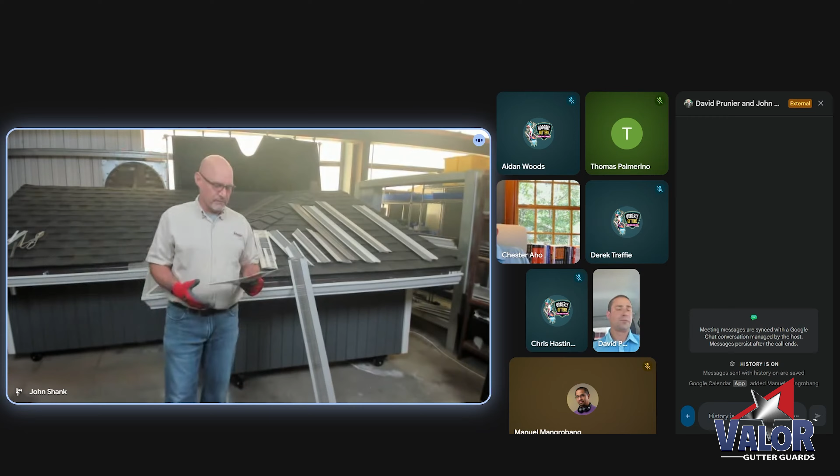So the reason for this webinar today was to just kind of get you guys all familiar with Valor Gutter Guards. Many of you have already sold it before, so you're well versed on what Valor Gutter Guards is all about. I'm going to go over the specification sheet just to give some general information, talk about Valor, why we're in the top echelon of gutter guards, and what makes us a little bit better than the competitors out there. I'm not going to go too much into installation, although I will show some installation stuff in this process, because the salespeople really need to know part of the installation process in order to get a good, accurate estimate on a house.

So the product specifications for this product: we are Valor Gutter Guards. It's made with a 304 stainless steel screen and an 020 cold rolled aluminum frame. That cold rolled aluminum is the same aluminum we use for roof kits or roof caps. Those are 50-year items that we're all familiar with if you've ever worked on roofs.

The screen area on the gutter guard is specific to this guard for siphoning purposes. You'll notice it's smaller than most screens out there, and the reason is because the frame underneath gives it a siphoning system that is unmatched by any other gutter guard out there. The louver frame underneath the screen creates that siphoning, and the design on top also does that. So the design creates surface tension, and then the frame underneath creates 10 times more surface tension, so the water can fall freely through it.

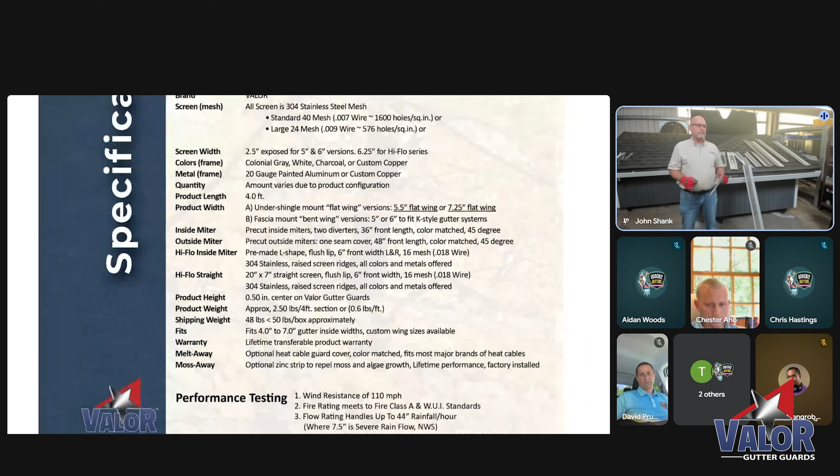Scroll up. Again, the exposed area of the screen - most of your water goes into that screen area in the first inch on that screen. If you've ever done a water test before, you're probably well aware of that.

This gutter guard should only be installed at between an 11 and a 19 degree pitch. If you have to go flat, you can, just make sure you're informing your customers that when you put it in flat, there is a little bit of maintenance involved in brushing it off once in a while, because when the wind stops and the rain stops, if it's sitting flat, the debris stops too. So you want to keep that in mind while you're talking to your customers.

We have the bent wing product, which is what you guys use, and we also have the flat wing product available to you, but you guys focus on the bent wing. So I'm going to try to stick to the bent wing installations and things pertaining to that product. The bent wing product is the most universal. You tend to use more custom sizes in your region, so when you're doing a custom size, we'll get into how to do a proper measurement. If you run into a box gutter or a commercial gutter, we can make custom sizes for those, as you're well aware.

The 304 stainless steel.

The reason they call it 304 is the amount of nickel in the product, so it's giving it its resistance to corrosion. You shouldn't get any discoloration or rust on any of the parts of our products. They should fare very well in any environment. So unless you're right on the edge of the ocean, you're still not going to have too much of a problem, but you might consider doing some other things to give it an extra barrier.

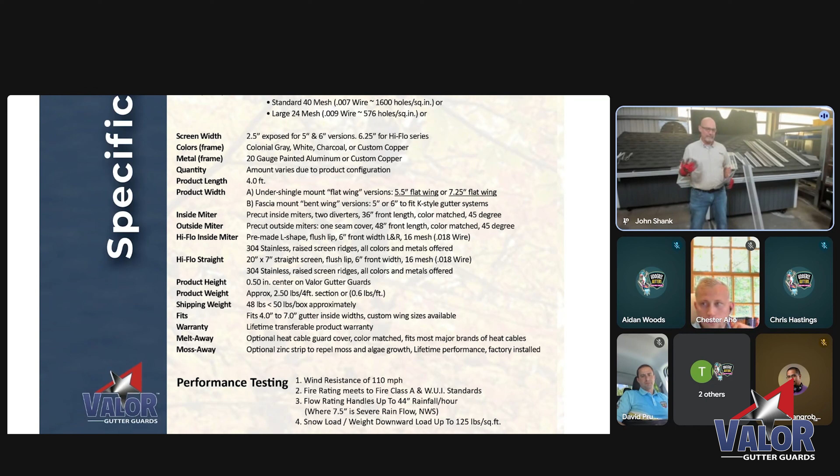The reason it's gotten so serious with the insurance companies is obviously because of the claims, and the claims are widespread now. They've got them in North Carolina, they've got them in Florida. Florida just had an Everglades wildfire, of all things—fire burning on the water. New Jersey has had wildfires. They're spread all across the Midwest in smaller places. Ohio's been hit with this. So if you just look up Wildland Urban Interface and its rules for Vermont or Massachusetts, you're gonna get the information on that.

I use ChatGPT for that, and you can get that information. It's a really good selling tool. Hey, if you're putting a plastic guard on your house, it's probably a good idea not to do that, because the insurance companies are going to come back at you in a couple of years and tell you you've got to pull it off and put something on that's fire rated. And we happen to already have that, so do you.

The flow rating is about 44 inches of rain an hour. Again, that S curve on the gutter guard, the screen, creates surface tension, so water falls through it automatically. But when you put something underneath it, it's kind of like when you're camping and you've got a tent up and it starts raining—you get a little puddle on top of your tent with a slow drip, but if you touch that slow drip with your finger, it'll just pour right through the tent. That's surface tension, that's what that's doing. So while that frame is touching the screen underneath, it's causing that water to fall through much quicker, and we can get a much higher volume of water through that guard in a much smaller area of screen, which makes it, bar none, one of the best gutter guards out there.

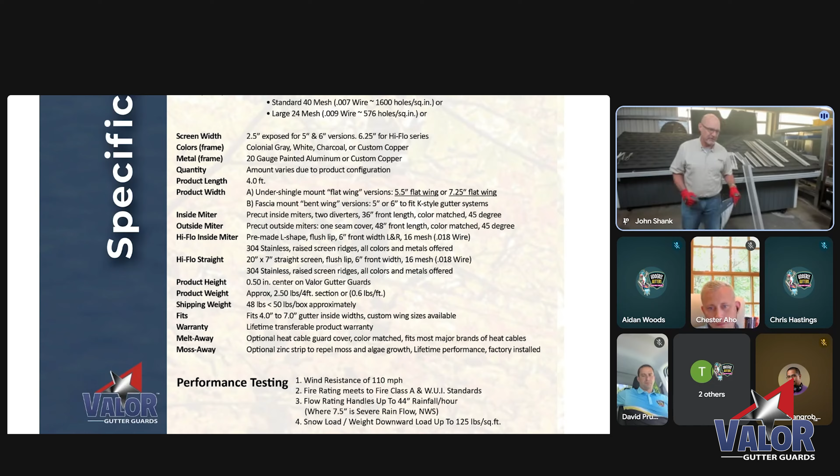The snow load for these is about 125 pounds, but with the bent wing, again, it's going to hold a lot more snow load than the flat wing that goes underneath the shingle. And again, we're using our lowest common denominator for what our products are. We try not to use the highest, because if the one that has the lowest obviously fails, then we've misrepresented ourselves. So we try to keep that at the lowest common denominator.

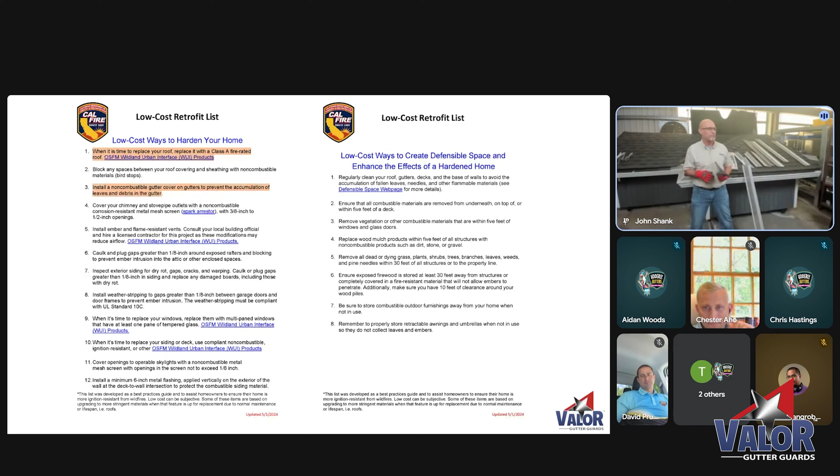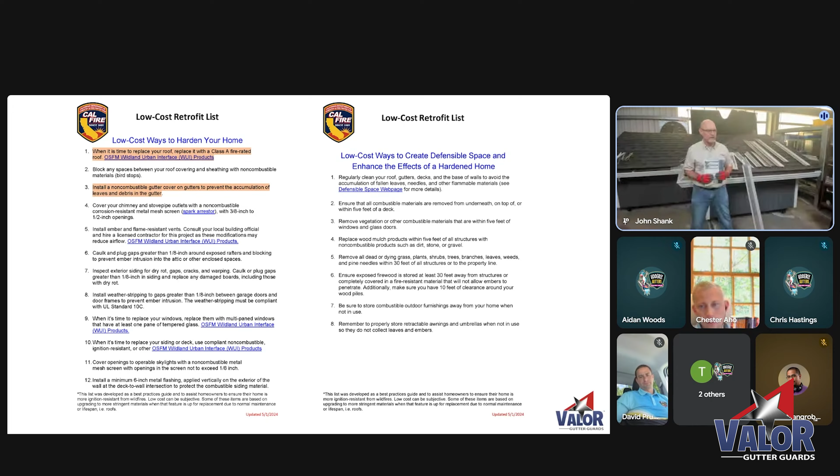This is basically the retrofit list for California that is now sweeping the nation for wildland urban interface stuff. I'll include this info for you. I'm not going to go too much into it because it won't pertain to you as much right now, but it's something you'll want to use in your sales kit if you're going up against somebody with a plastic guard, or a guard with plastic attached, because they are going to become obsolete over time.

This is the ASTM rating - American Society for Testing and Materials, E84 and E2768 testing. This has been through a rigorous burn test, a 30-minute burn test. What that means is they basically put fire to the gutter guard and check to make sure it doesn't disfigure or burn for that 30 minutes. If you pass that test, you pass the ASTM fire test.

There's a lot of guards out there trying to get this certification. I believe there's only two at this point - us and one other guard. One thing you got to think about with that other guard is, does it hold debris on top? Ours is installed at an 11 to 19 degree pitch, so it sheds debris optimally, meaning you won't have a lot of debris stuck on top. If it burns, it's not going to get through and it's not going to get underneath the shingles - it just burns that fuel on top and then it's gone.

If it's inside the gutter, many times that kindling, because there's much more of it, will catch fire up underneath the shingle and get through the venting system and take the house. That's why we had these tested and are trying to get people informed about this before it becomes a state regulation or law like it already has in California. And this is sweeping all across the country.

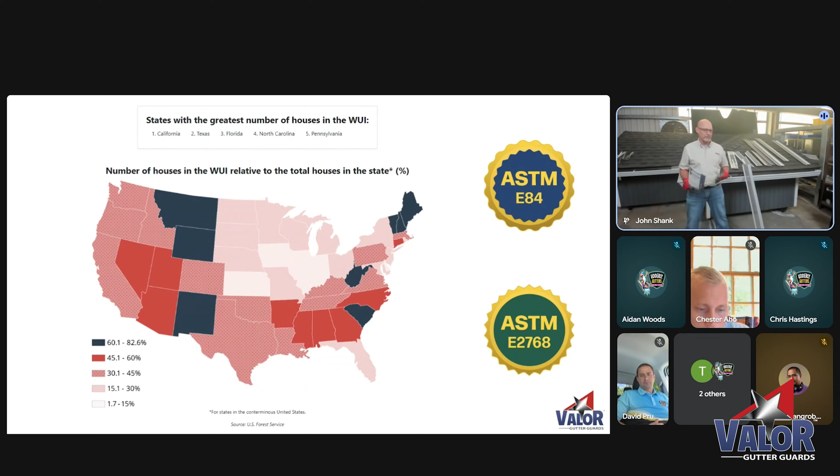Most states in the country, if you're in a heavy WUI territory, you'll see - you guys are 60 to 82% in Vermont, and 30 to 45% in Massachusetts. So you're in heavily rated areas for wildland urban interface, which means you're going to need those products over time, even though it might not be prevalent right now. It's going to hit you nationwide, and when it does, you want to be prepared, and you can preemptively win deals you wouldn't probably win before because you have that tool in your tool belt.

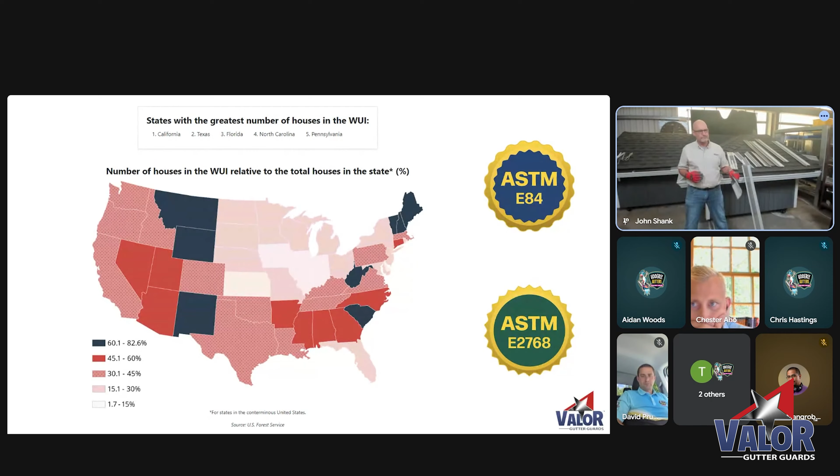This was Ohio Capital Journal, from when it hit Ohio. A lot of insurers were dropping insurance in Ohio. Ohio is not a wildfire state, but they're all in WUI territories - up to, I believe, 56% of properties are in wildland urban interface. So they're getting hit with these insurance problems: you got to put these home hardening products on your house, or we're going to shut you down as far as homeowners insurance goes.

That doesn't just affect us - it affects the mortgage industry, it affects loans and finance, it affects a lot of different areas. Real estate obviously comes into play because now people have to self-insure and things like that. So if you don't have the money, you can't buy that house. But if it's home hardened, it might go up for sale, and a company might insure that mortgage. So it's important that you know those things.

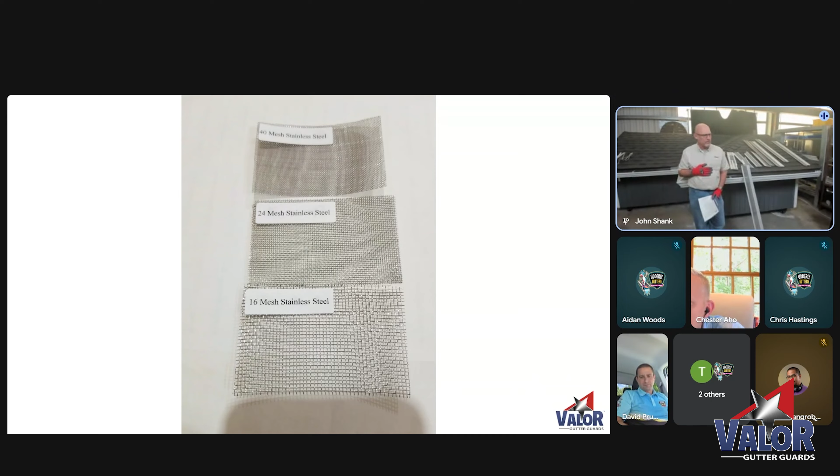I'm not even sure. I just know we've had a few complaints recently about it, and they're sticking up in it. That's really unusual for 40 mesh - the pine needle must be really super thin. If you get some pictures of that, send it to me, because I need to see that. That's gonna make a difference on whether or not they do something.

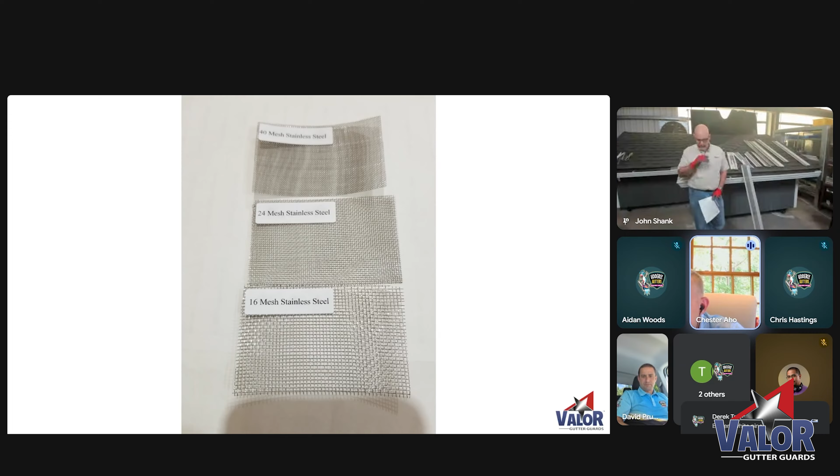Derek said it's Eastern white pine. Okay, you would know better than me. Manuel, can you write that down? Yeah, we'll make a note of that. We'll look it up and do some research.

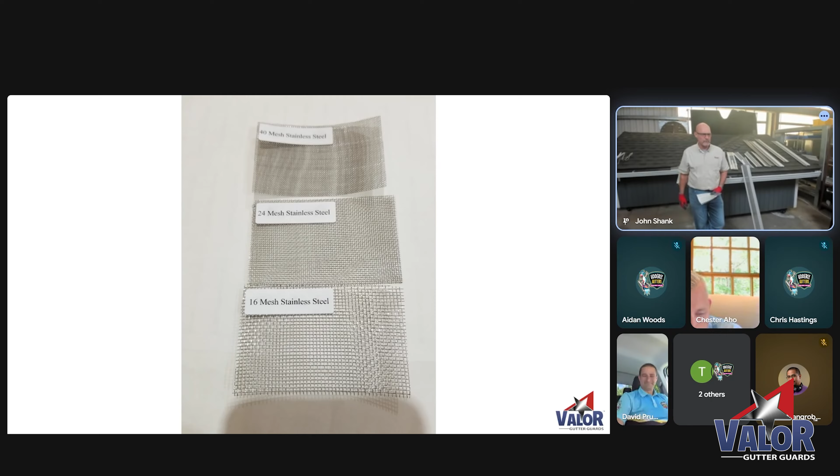So you don't have to worry about it right now. We've got enough 40 mesh to last us until next year. So go ahead and go to the next slide.

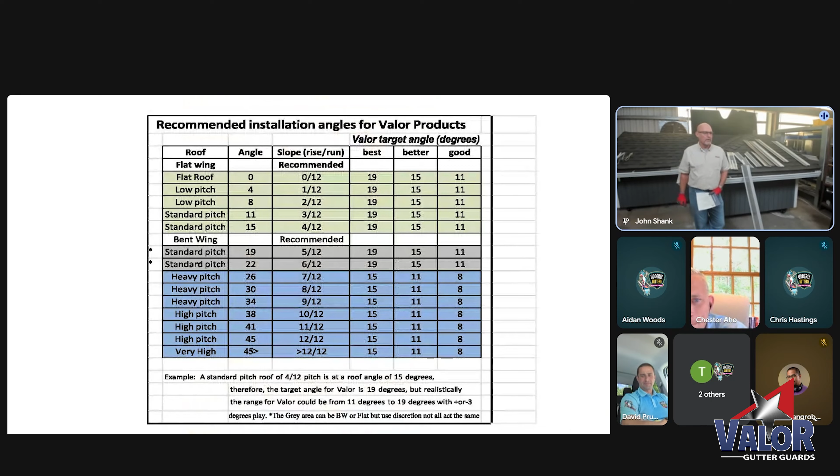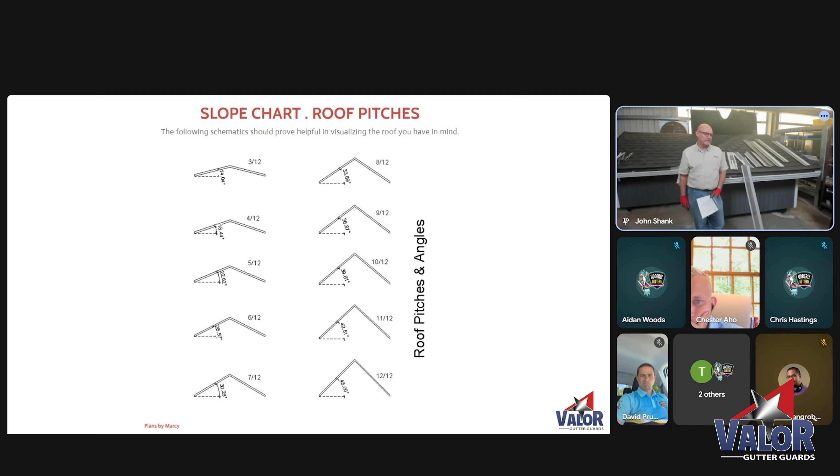So this is just your standard pitch chart. I usually share the pitch chart when we're doing flat wing and bent wing, because you can go underneath the shingle with a flat wing up to a 4/12 pitch - above that, you don't want to do that. Since you guys use bent wing, it really doesn't pertain. Go to the next slide.

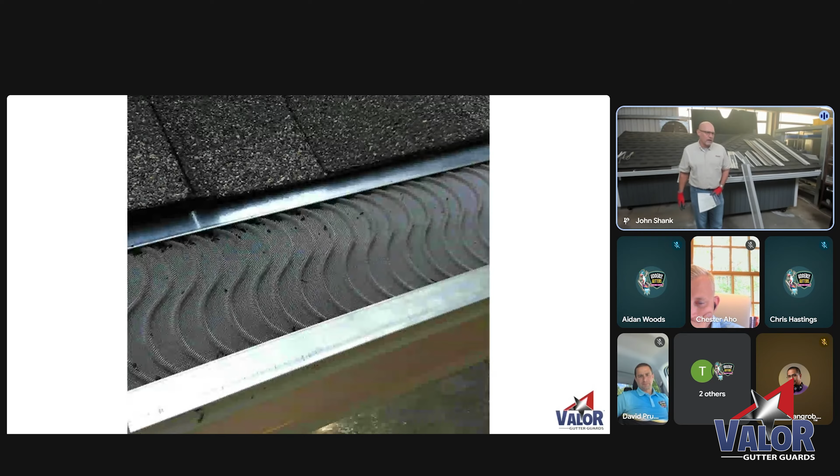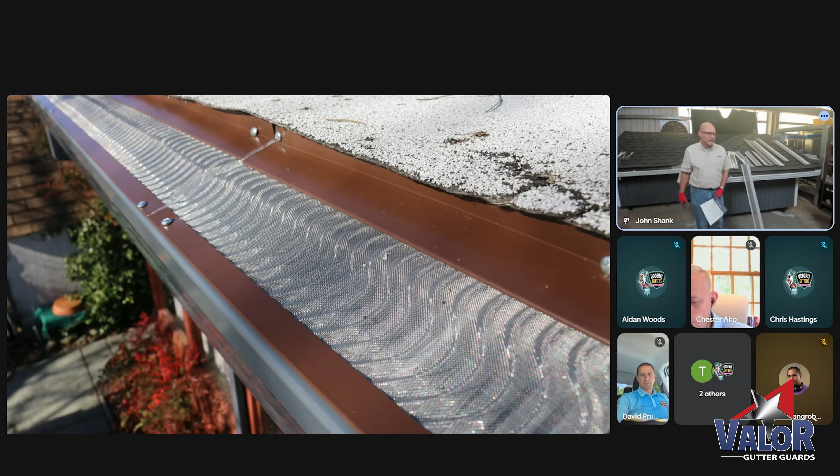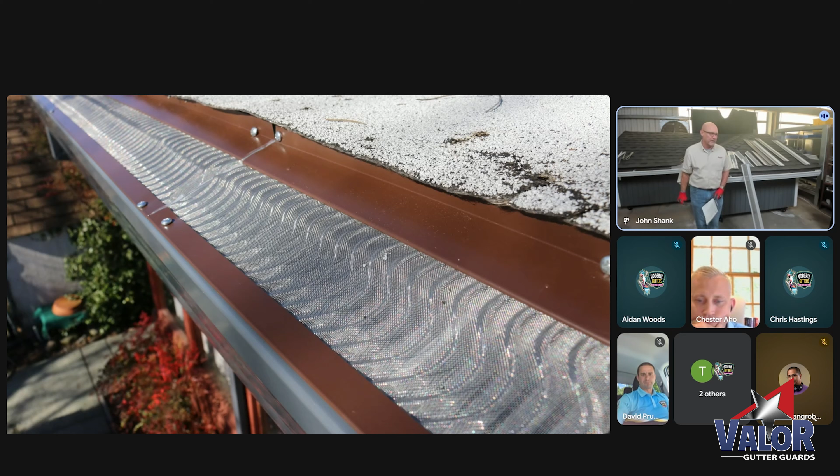These are just installations - you'll see that seam there. The reason we do the seam that way, which is a bend down method, is to prevent drips. If you ever see a drip at a seam, it's usually because you have a little bit of screen that's smashed in between the frame, or if it's not cut back enough, or if you put caulking in the seam like this one was. Yeah, you can generate your own drip with the caulking. So I usually recommend, if you're going to caulk the seams, not to put it all the way up to the frame - come up just short of the frame so that the water will still stay in the gutter.

Because what happens is the water will just run along the silicone there. I like to tell the salespeople this because they need to know what to look for if they get a complaint. They need to understand that if the seams are done right and the corners are done right and the end caps are done right, you should not get a drip if they're pitched properly.

Do you guys recommend caulking every joint? It depends - if I have a bad bend and it's just not a good enough pressure seal, I'll put a bead of caulking in there. If there's a gap in the back behind the gutter, like that one had, then I'll fill that little gap in just to keep embers out, because it's important in California.

It's more important in California right now. But yeah,

As good installation practice, if there's a gap or opening, put a little bit of caulk in there. Do not drag your finger down the caulking, just let it go in naturally. If you drag your finger down the caulking, you'll make a little gully, and water will move along that gully. If you pull that all the way out to the front, it'll just run right down to the front. So you want it to break side to side. If you leave a natural bead there, you're fine, even if it's not perfect. You don't want to try to stuff it in there.

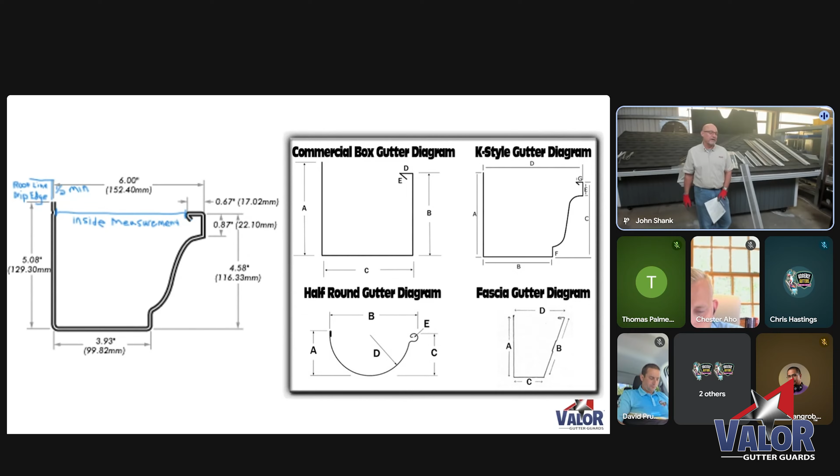If you're doing a custom gutter, half round, box gutter, K-style, you guys use a lot of custom, so I'm sure you're well aware of this. If you see on that blue diagram, the blue side, it needs to be at least a half inch clearance above the gutter on the back side for you to mount that bent wing product. You want to make sure that half inch exists. If it doesn't, you'd have to consider lowering the gutter if you're going to use bent wing.

Some guys will put it in flat. They'll cut that bent wing piece off and lay it flat on the gutter. You can do that, it's okay to do. Again, you've got to inform the customer that this is going to be on there flat, and you will have maintenance once or twice a year depending on how much debris you have. It's still going to work efficiently as far as water intake and keeping debris out of the gutters and keeping it unclogged, but aesthetically you're going to have some things on top of it. Much like with pine needles, when they're sticking in there, the gutter guard's still working fine, it just usually doesn't look as good aesthetically.

With the box gutters, I don't know if you guys have fascia style gutters. We have them all over here. We have a hodgepodge of gutters here in California because of all the custom homes and stuff, so we run into everything you know out there on the market.

We can also do, like with the commercial box, a gutter guard up to—I think the biggest one I've done has been 26 inches wide. So we can make gutter guards bigger if you have a commercial box gutter that's 10 to 12, even 15 inches wide. It's not a problem, we can custom make those if you run into that.

Again, on the bent wing product, when you're doing an inside measurement, you want from the back of the gutter to the inside lip of the gutter, because there's a little puzzle piece on the front of that frame that you'll notice sits down below the gutter lip when you install the gutter guard.

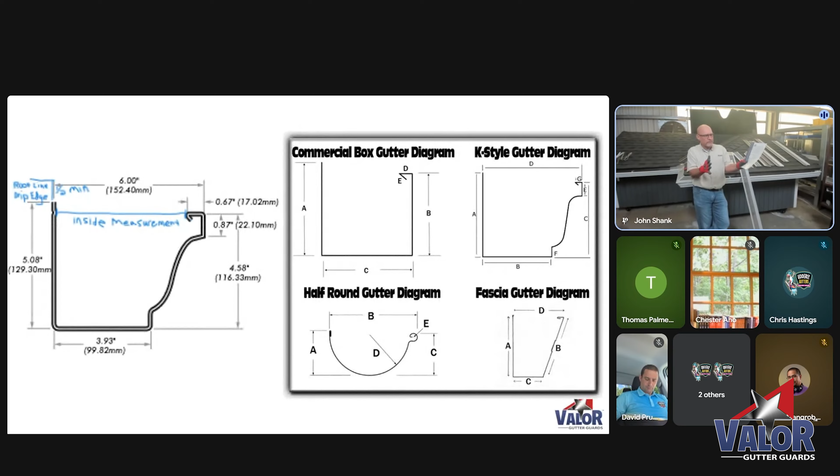Once you get that measurement, you're going to measure it down to that inside lip, and that's your measurement. You'll want to measure it in more than one place, because sometimes gutters, I've seen guys put 3-inch gutter hangers or 4.5-inch gutter hangers on a 5-inch gutter. Depending, they'll have 2 different sizes on there, and they'll have it pulled in on one place and pushed out on the other. Hopefully you don't run into that for a retrofit and you're just putting them on new gutters. But if you do run into that, just make sure you get a couple measures to make sure it's consistent.

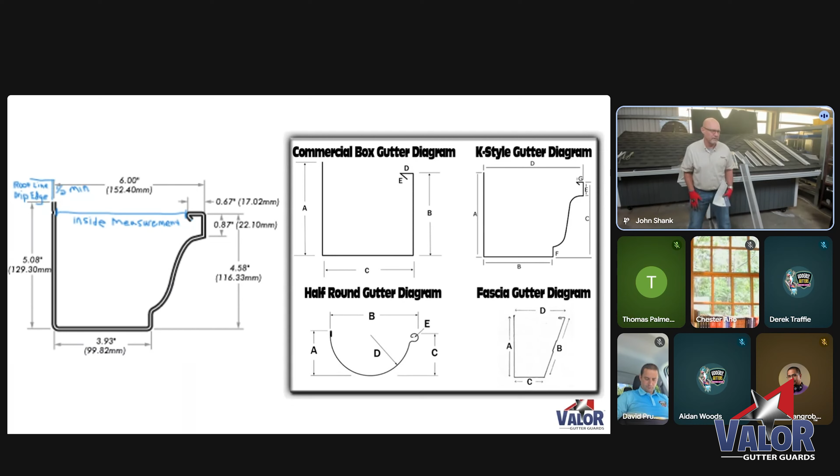Half rounds, it's more prevalent to have an abstract or a different size gutter on the inside. They don't usually, they're more custom fit than most other gutters. Go to the next slide.

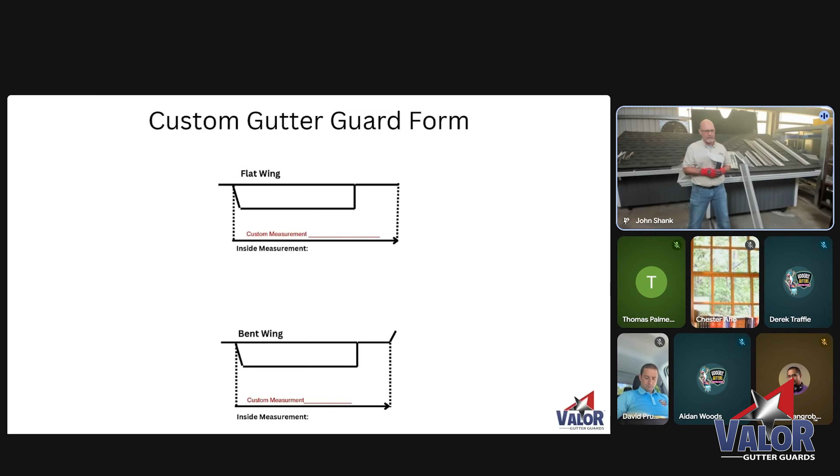So if you do have a custom gutter guard, you guys already have your method of doing your diagrams. So this doesn't make as much sense, but if you need one for when you're out on the job site to write the measurement down so that your guy back at the office can write it up properly, I can provide these for you as well. You just write your measurement in there and you're good to go.

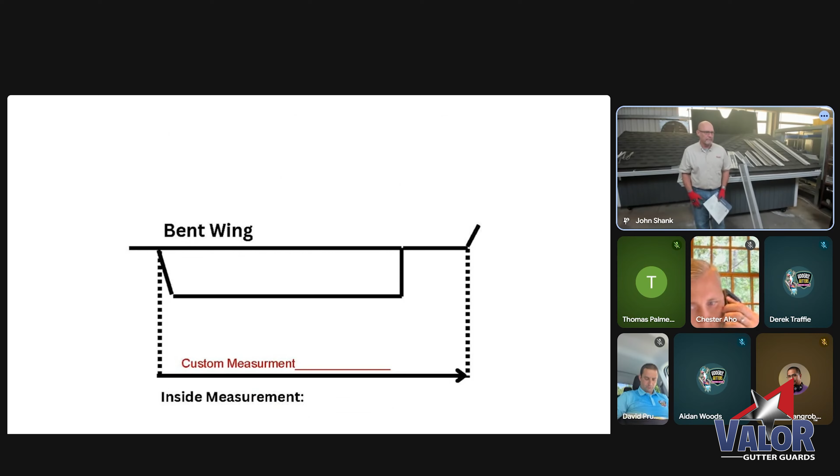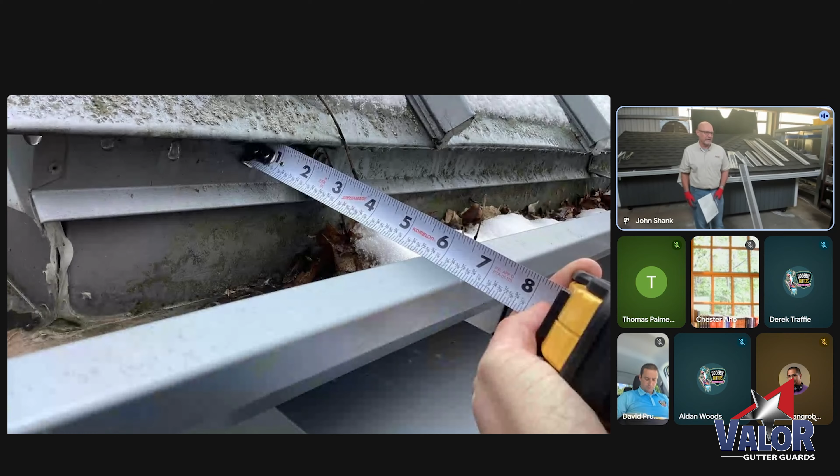This is how, what I was talking about. So if it's going to sit at an angle, you want to measure with the angle. If you measure it straight back, you're not going to get the right measurement.

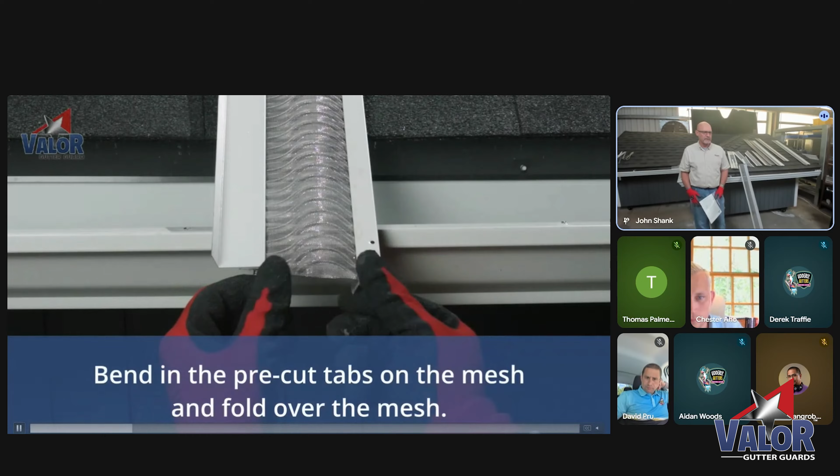This is just a quick installation video of the bent wing product. I just want you to see it so that you can understand what they're doing here. This guy is basically folding. He's folding the tabs in. I like to cut them off, and then you'll press it together to make your pressure seal.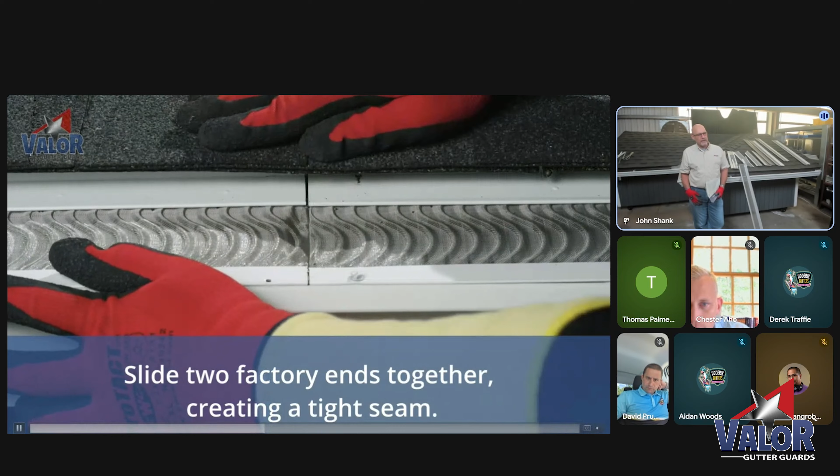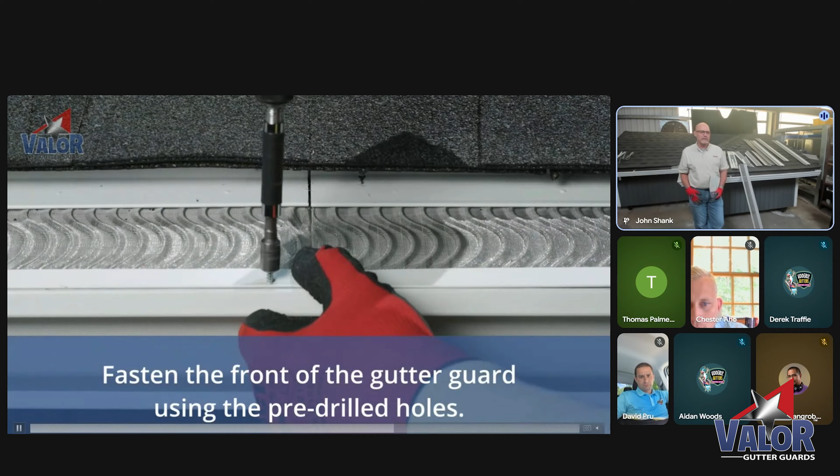Many of you guys, your installers have probably already watched these videos. I just want the salespeople to see it so you can understand what they're going through and what they're doing on the roof. Pretty simple, but if you're not handy with what you're doing, it can be kind of a problem. The guy who does the install on this video goes too far with that caulking. He's supposed to stop a little bit shorter of that metal, but I just want you to be aware that if you see caulking on the front part of the frame from the back to the front, on that front edge, make sure it's if you have a drip, that's probably what it is.

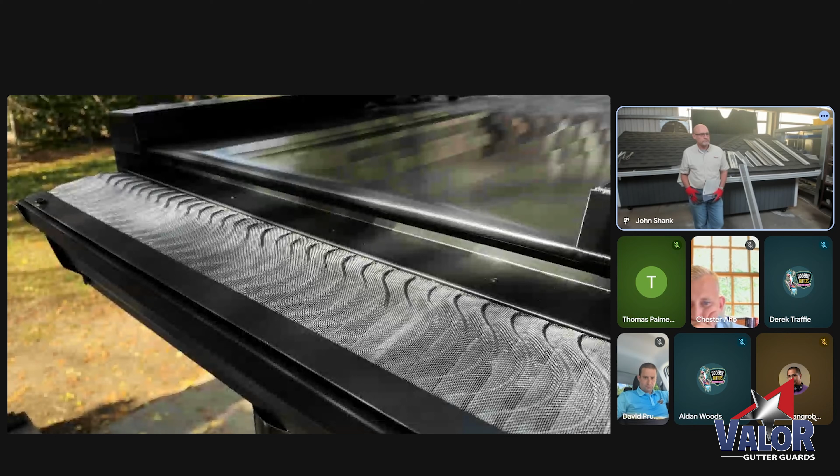This is obviously an install that you've probably seen this picture on our website. It's just a basic flat wing install on a metal roof. Metal roofs, you're going to run into a lot of the corrugated. Obviously, the standing seam is the most common. Water skirts off it a lot faster.

So I tend to use the larger mesh with the metal roofs because of the speed of the water. And you want to keep that in mind when you're doing a house or doing an estimate on a house. Is this one going to need large mesh? Is it going to need standard mesh based on the speed of the water? They both take the same amount of water, they just take it at different speeds. So the faster the moving water, obviously the larger the holes need to be in order to take the water faster.

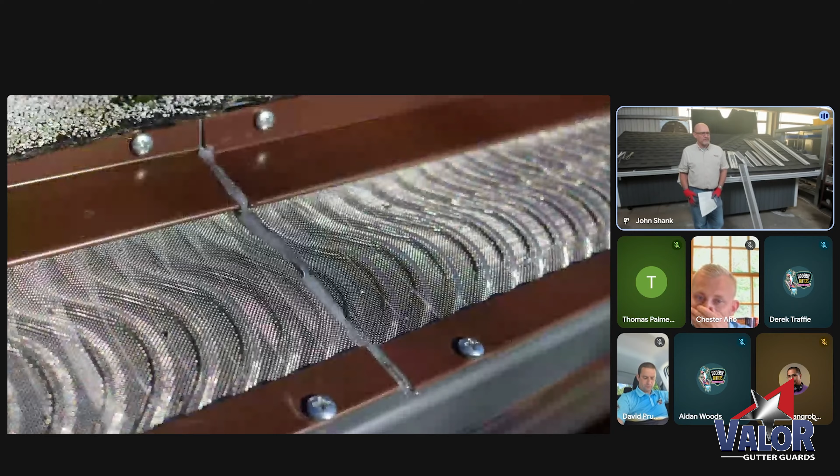Next, this is an example of a seam where the guy put the caulking in the seam and he shouldn't have put the caulking in that portion of the seam. You would want to stop it right before there. But you notice he did do it right in the middle. He lost a little bit, left a little bit of a gap, and that's okay. I'd rather have him do that than try to stuff it in there with his finger and create a mess.

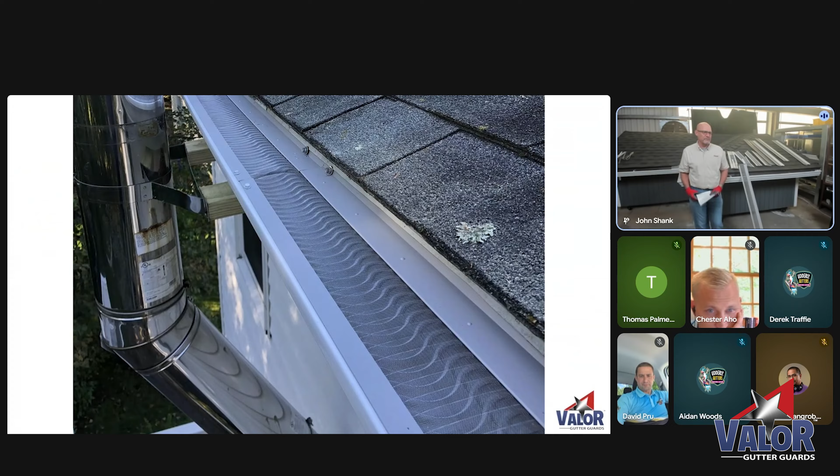That's an idea of a perfect seam. That one's nice and clean, doesn't need any caulk. It's got a perfect seal.

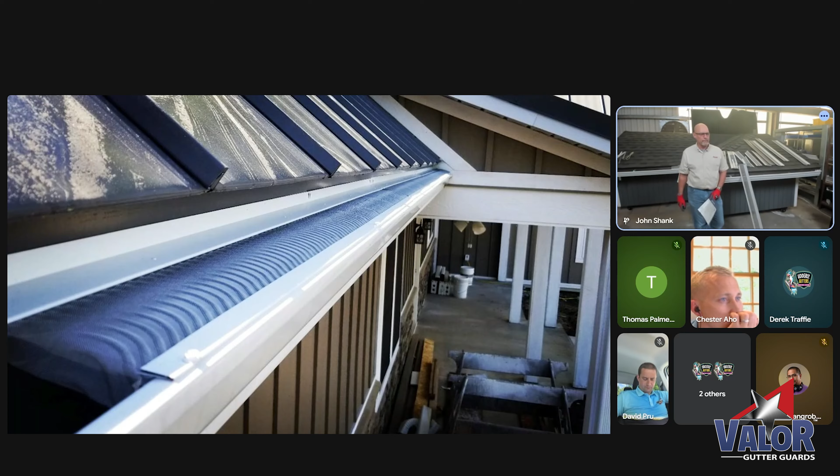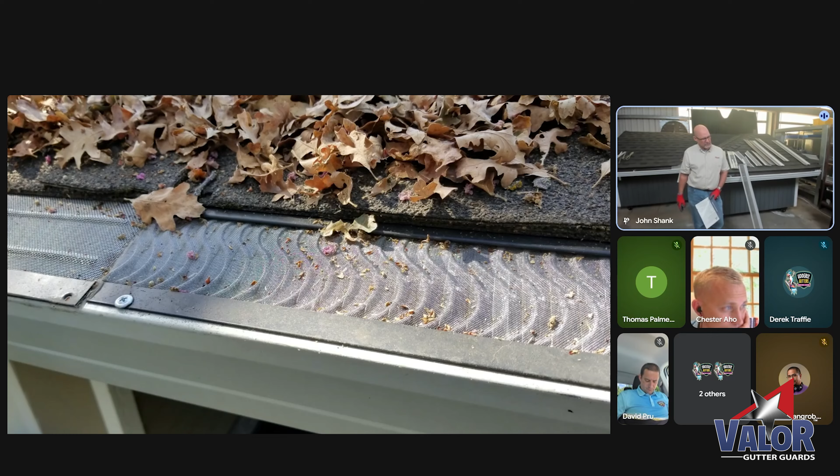This is where the high flow inside miter is. This has been on this house for about 6 years. I go out every once in a while and take a picture of it. When they did it, they put the caulking on that seam, and they messed it up, which is why you can see it's kind of dug out there. It's got a little gap, so I opened it up just so it won't collect water, and it stays on top.

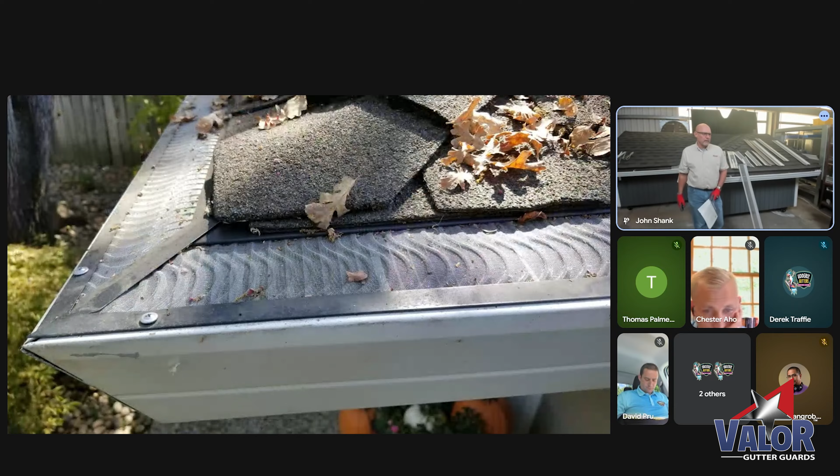That's just an outside corner of the same house.

So this is the high flow inside miter. I'm not sure if you guys use them, but if you end up with a fast moving valley, like a W valley over the porch or back entranceway, a lot of people have a problem with water going over while it's raining, so they can exit the house without getting wet, or at least not get a waterfall on their head. These tend to work pretty well. I usually use diverters with these. You'll put 3 sets of diverters if you have fast moving water in order to slow it down.

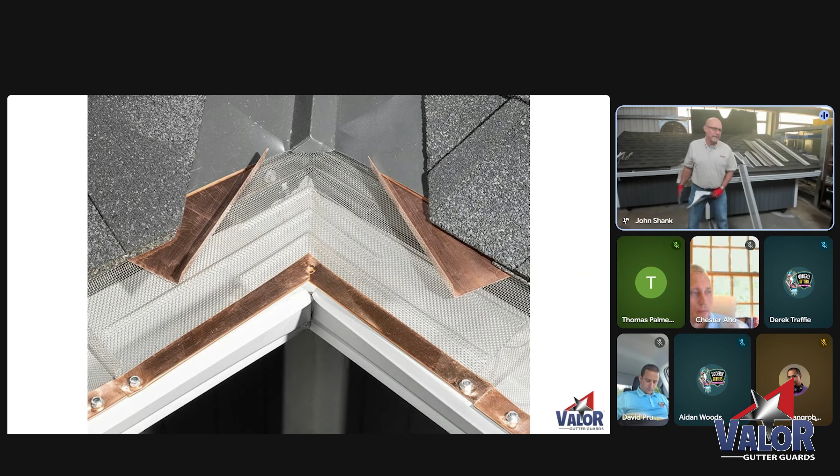If you're in that situation, I can certainly do a class on that for the installers if you guys need to see how that method is done. There's also a thing called the Valley Guard, which is a rubber mat that goes in that inside corner and slows the water down so you don't get any overshoot at all. It's very low profile, about a 1/4 inch high, just there to slow the water down. It's got little louvers on it, and I can show you what that looks like at the end here.

That's just another copy of the inside miter. This is on the back of that same house. And that's another inside miter. Sorry, there were a few pictures in here I probably should have pulled out.

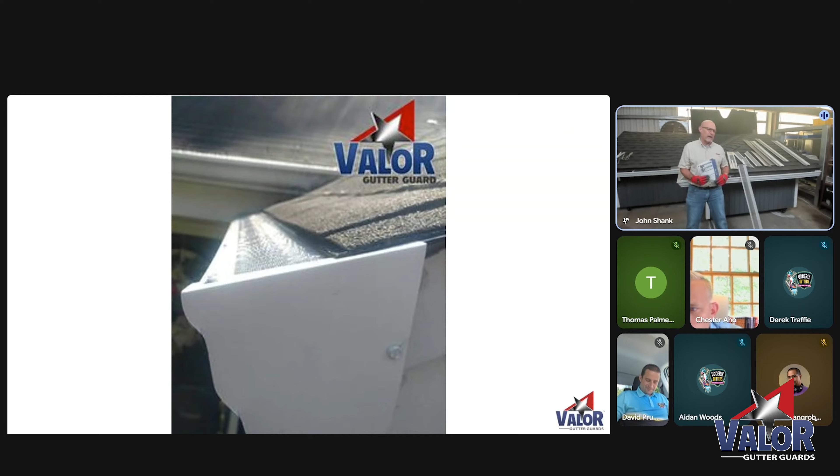This is just how a standard end cap might look if you want it really custom. This is somebody who took a piece of flat stock or guttering material and made their own. I thought it was pretty nice, so I threw it in there so you guys can see it. This is another style of end cap.

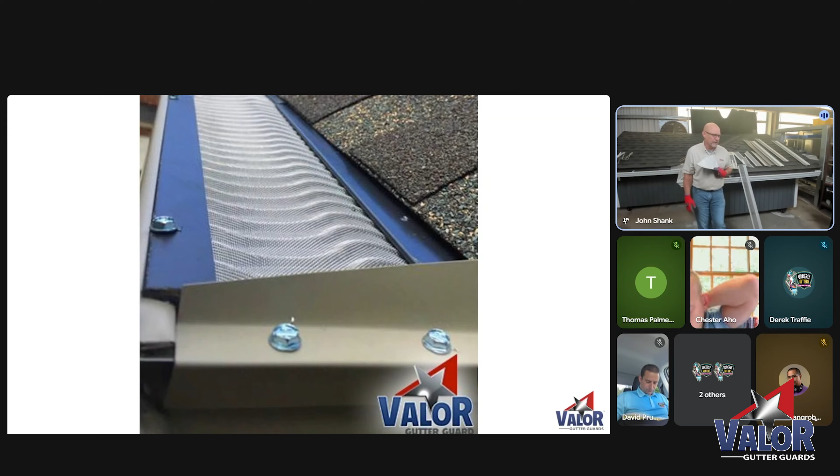This is to keep the water in so it doesn't go around the edges. Sometimes when guys put those in, depending on the type of roof, they might get a little bit of a drip on the end cap, and this guy does them this way so he avoids any kind of dripping.

And this is another style of end cap that we do. So there's lots of different ways to install the gutter guard properly. This particular end cap is my least favorite because they put a screw in the side of the gutter, and I don't like that method.

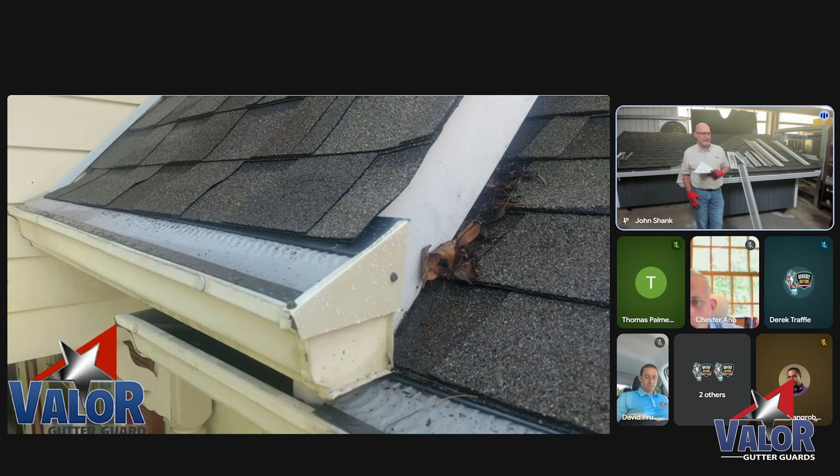This is our standard regular, and that's what our diverters kind of look like. So our diverter set is a makeshift end cap. If you guys ever want to put a nice finishing end cap on there, the diverter makes a good end cap. So let's talk about dry areas under the awnings and things like that.

So obviously you're not going to install a mister under every single one of those so that every time it rains you put mist on it. But we use a device called the ice melt product. It's not necessarily for ice, but the device itself is supposed to cover a cable, and it also acts as a break for dry screen areas like this if you run into it.

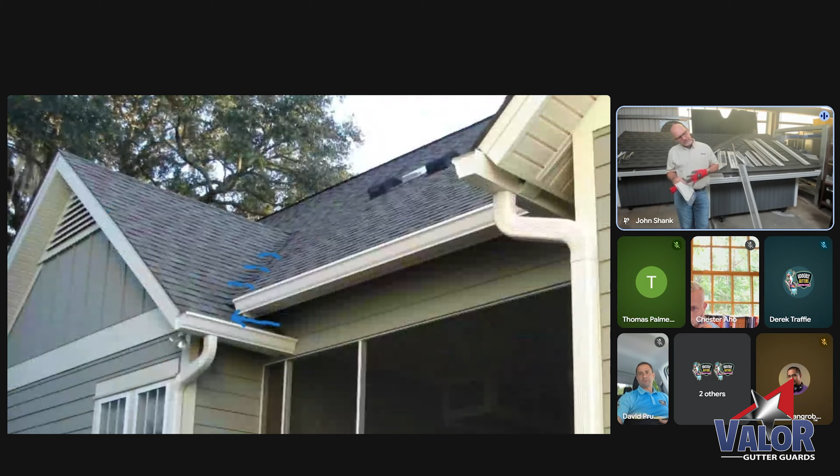Next slide—this is a little bit more unique. This situation is you've got a screened area down below there, and it looks like 3 parts of the roof all empty into that top gutter.

And then you have the inside corner at the same time, and it all empties into that one little spot. So if you put a gutter guard on there, a screened gutter guard, and it's dry underneath that gutter, you might have an overshoot issue, which would run into that screen area and create a problem. So I would put a diverter there to just divert the water to the wet side of the screen. You don't have to, it doesn't have to be perfect, but it's a good idea to slow the water down in that region, to make sure you have an obstruction that's stopping it.

This is just another idea of diverters.

A lot of people say that gutter guards, Valor gutter guards, because some of them go underneath the shingle, will void a roof warranty. They do not. This is the GAF report telling you that they don't. If they're done with good roofing practices, you can put any gutter guard on any roof. It's never been and never will be a problem, unless you put a nail in the roof. There are some gutter helmets out there that mount to the roof, and that automatically voids a roof warranty. So just keep that in mind.

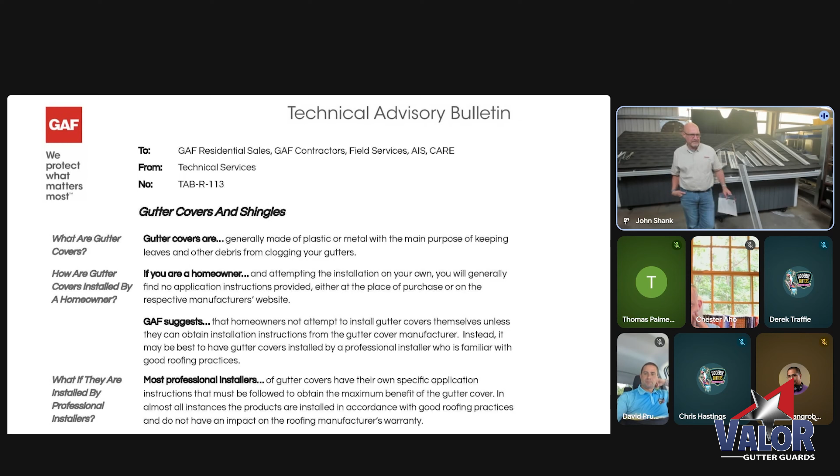We're sitting on the drip edge 90% of the time with a flat wing. With a bent wing, we're not sitting on it at all. So anybody that comes at you with that kind of stuff, you don't have to worry about it, you have a rebuttal for that. And I can give you a copy of that GAF report for the roofing materials.

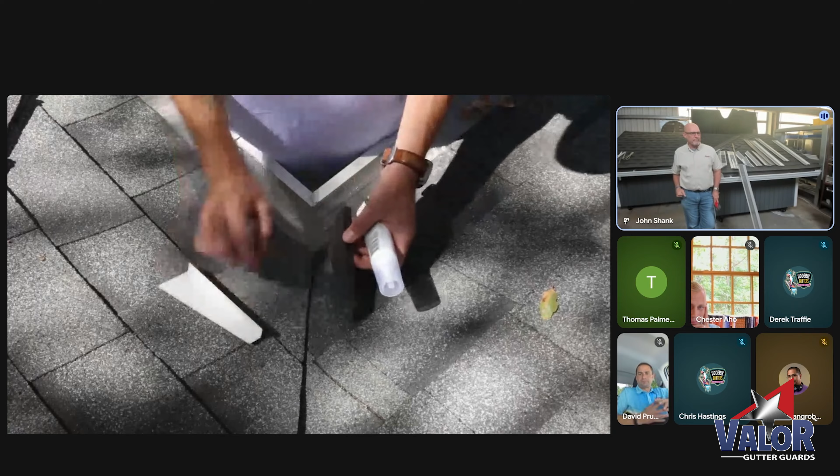This is just a high flow inside corner that I was talking about earlier. This is installed, and they're going to show you what I meant by placing those diverters. You're basically going to glue them underneath the shingle, and you'll put 3 sets of those. What that does is it just slows the water down. I put them all the way together, and the reason I do that is because the water will come straight down that center at its fastest point, and you really need them closed to have that stopped and slowed down.

What you will get up top, if you put 3 sets there, is ramping. So just keep in mind, if you're writing up a sale, you might have a problem with this inside corner, just make sure you include on your estimate that it might need diverters in an inside corner, just so you don't get overshoot.

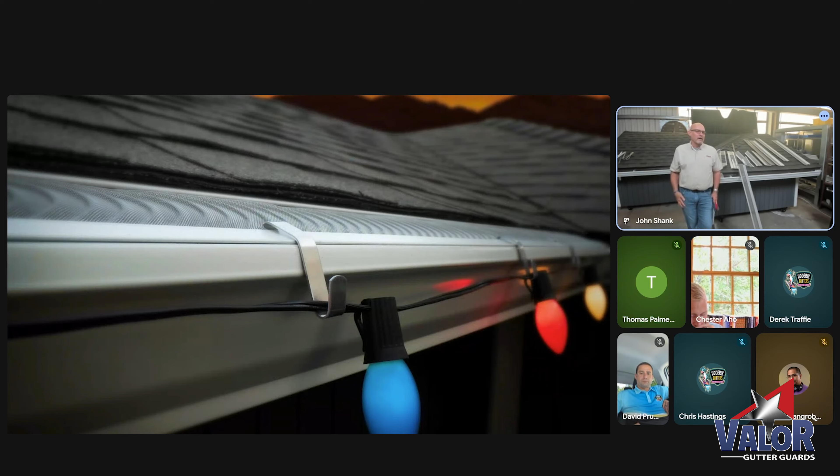Christmas light clips. If they say, what do I do with my Christmas lights, we do have Christmas light clips you can install. You can press those shut to make them more permanent. You can also use them at screw sites on the gutter guard to make them more permanent as well. A lot of people just like to slide them under that lip of the frame and then bend them down, holding them lightly so they can easily remove the lights. However, in places with a lot more wind, like near the coastlines, it's better to have them more secure so they don't blow off.

So Valor Gutter Guards has a lifetime warranty, for parts only, so keep that in mind. And when it says no clog warranty, it means the gutter's not going to clog. It doesn't necessarily mean the gutter guard is not going to get stopped up, because we don't have any control over cottonwood trees, certain types of things, sap that might empty out onto the screen.

If you run into cottonwood or sap, like under a pine tree where it discharges a lot of sap onto the roof, you'll be able to see that. If you see it, just let customers know that every once in a while you might have to hit the screen with WD-40 to get the sap off, then use Dawn dishwashing soap to wash the WD-40 down. That will get the sap off the gutter guard and make it function properly again. I don't run into that hardly ever, but it has happened once or twice. So I like to let people know, especially if we're talking about pine needles, that if the tree's hanging over the top and bleeds like a redwood does, the amount of pine tar that comes off there, you might consider telling the customer to keep an eye out on that particular spot.

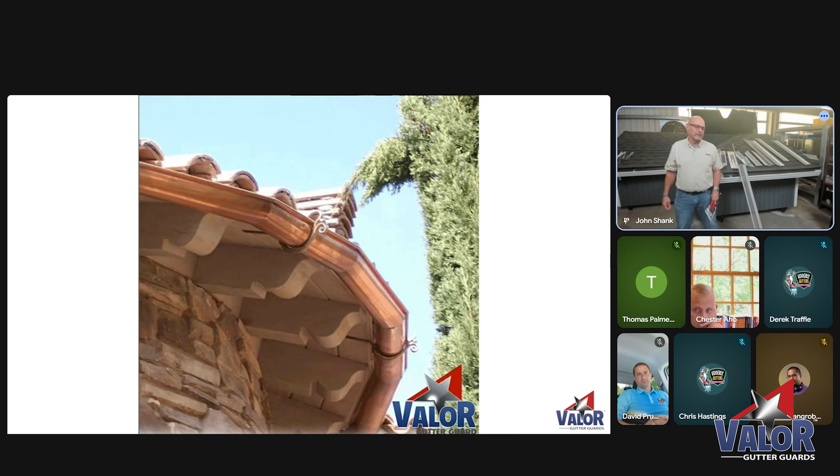This is just a copper gutter. We do make copper gutter guards for copper gutters. They are priced a lot different, they're a lot heavier, and they are special order. So make sure you give yourself plenty of time after doing an estimate for copper to get those custom made.

And that is the basics of Valor Gutter Guards. Does anybody have any questions? Chester, you guys have any questions?

Sort of - I would be curious where we see a brochure or paperwork on all these little inside corner features? That's going to be in the catalogs that I send you guys, so I could send you some more catalogs if you need them. In the back of the catalog you'll see all the accessories, and you'll see there's a lockwing bracket. The only solution we've ever provided for inside corners is to do the large mesh Valor, just a couple feet each way. So all these other little features are brand new information for us, something we've never offered or presented.